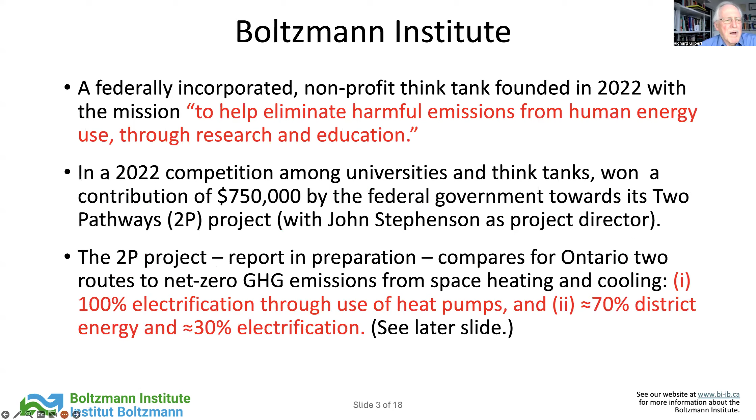Next slide, please. So we want this one, yes.

So we had a lot of conclusions from that study tour, and if you go on our website, you can see it at the bottom right there on all the slides. You can get a report on the study tour, but there were two general conclusions that we made. The first one we didn't expect, and that is that the optimism about decarbonization possibilities for buildings was there and evident, and some communities, big ones and small ones, were almost at decarbonization.

Copenhagen reckons it's about 96% there. One smaller community on Gotland Island reckons it was already there. Everybody we spoke to said, yes, we're going to decarbonize our buildings. By that, I mean decarbonize the building operation, particularly space heating.

We talked to a lot of people about more general climate issues and decarbonization, and there was actually more pessimism than optimism that any of the other sectors would be decarbonized by 2050 or 2045, as some people's targets were. Transportation, maybe in Norway they thought it was possible, but even then not necessarily for aviation and heavy trucking. Elsewhere, maybe not even for ordinary passenger travel.

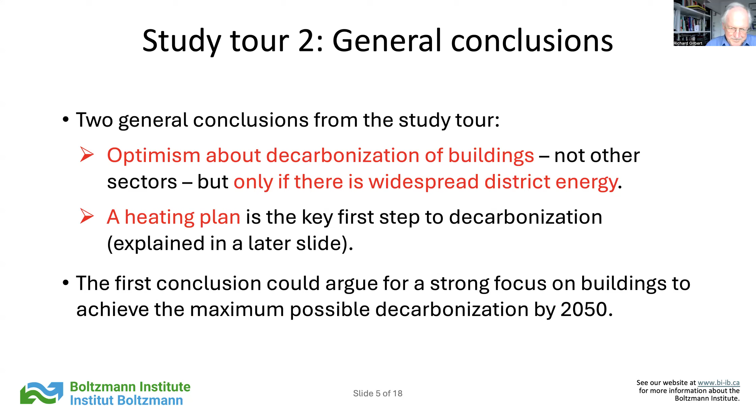Next slide, please. You've gone through two, one back. Thank you.

So, as I mentioned, approximately 70% of the floor space to be available in Ontario in 2050 exists today, and 30% is to be constructed. Now, the 30%, at least in theory, and to a considerable extent in practice, needs little or no added energy if it's built right. If you build it to passive house standards, you can get down to almost near zero, and you can build to net zero standards.

And if you look at this table, the left-hand number column, the peak watts per square meter, that's the amount that you have to put in at the peak. You can see, working from the bottom, that with net zero energy use you don't have to put any in because they are literally at net zero. Everything that they need is either coming from the building, solar, or the building doesn't lose any heat, essentially, or almost none.

The passive house standard recognizes up to 10 watts per square meter. If you look in Ontario, the residential after 2015, that's the current range, 65 to 130 watts per square meter. I couldn't get a number for the older residential buildings, but it's going to be much higher.

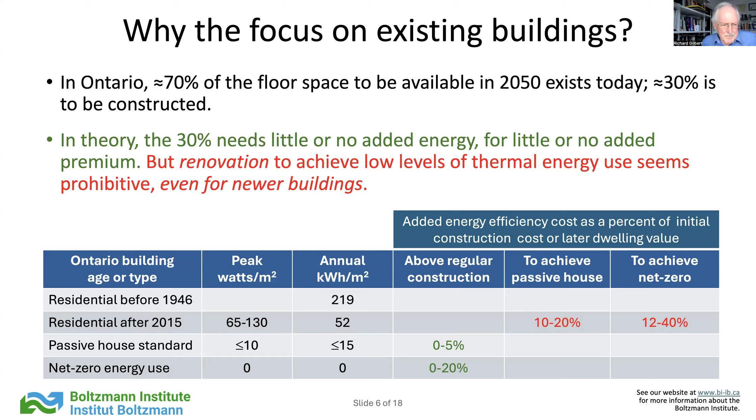Next slide, please. Next slide. There we go.

So this is the largest passive house development in the world, as far as I know. It's in Heidelberg in Germany. It's not right down to zero, so it's got supplemental heating from a wood chip fueled combined heat and power plant. The current cost premium over regular construction is between 5 and 8%. It was at the beginning of the construction of this development

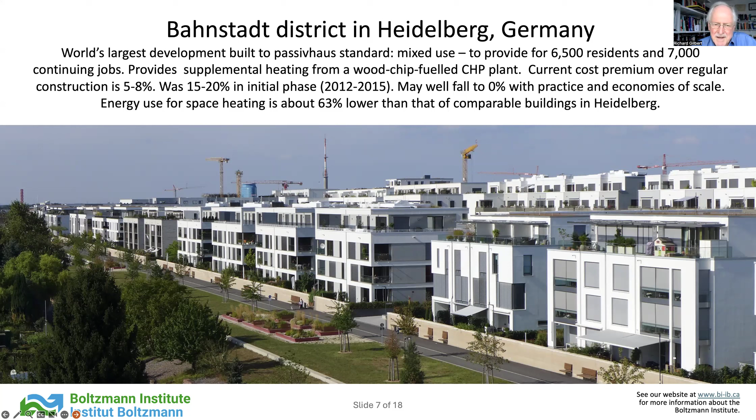considerably higher. As they learned and as they developed economies of scale, the cost of meeting the passive house standard came right down. And it may well fall down to zero in the next few years. I think they're about 80% through the project development now. So far, the space heating energy use is 63% lower than that for comparable buildings in Heidelberg. And Heidelberg happens to have a rather interesting mix of old buildings and buildings that are built to a fairly high energy conservation standard anyway, not yet passive house, but quite good.

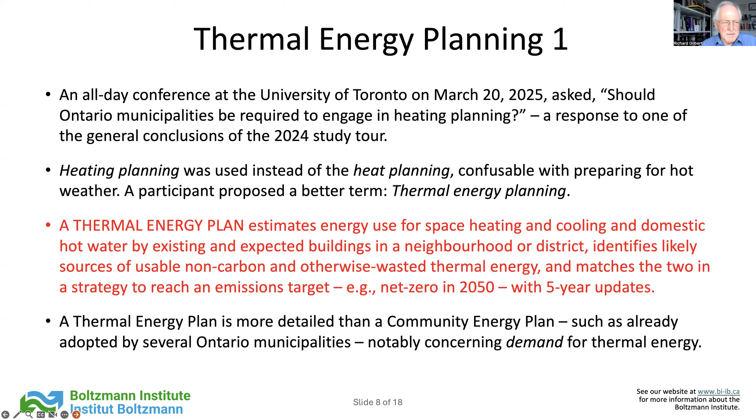So we did a little survey after, and a lot of people sent in emails, and there were two things that were agreed at the conference. One, thermal energy planning is an essential prerequisite for the attainment of net zero greenhouse gas emissions from buildings. That was the first and most important one. And the second one, which there was much agreement about, was that such planning would best be done by municipalities. The area where there was less agreement was who should fund this.

We had an estimate at the meeting from our German friends, and we have numbers from elsewhere, that it's very, very roughly $2 per inhabitant per year to do the thermal energy planning. The typical plan takes a year to 2 years to do. It depends on the resources you throw at it. It has to be renewed every 5 years. So if you average all of that out, you're into, in today's dollars, about $2 a person. It can vary a lot. It's more for smaller municipalities per capita. It's more for municipalities such as Toronto and Mississauga that have a lot of commercial space in them per resident. Next slide, please.

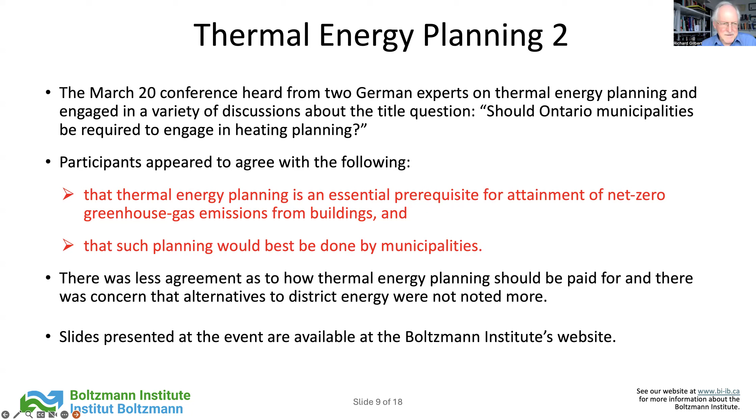We had an intervention, a presentation at the meeting by somebody from IESO, the electricity system operator responsible for planning electricity in Ontario. And he pointed out, Tom Aagaard, that the current planning outlook by this provincial government agency is for less than 10% of Ontario households to have heat pumps by 2050. No indication of what the other 90% is going to have, except that he said that probably they're going to choose natural gas unless there's a change in provincial policy. Actually, at the moment, it's about 70% fueled by natural gas, about 15% fueled by electricity, and the others have wood and propane and a mixture.

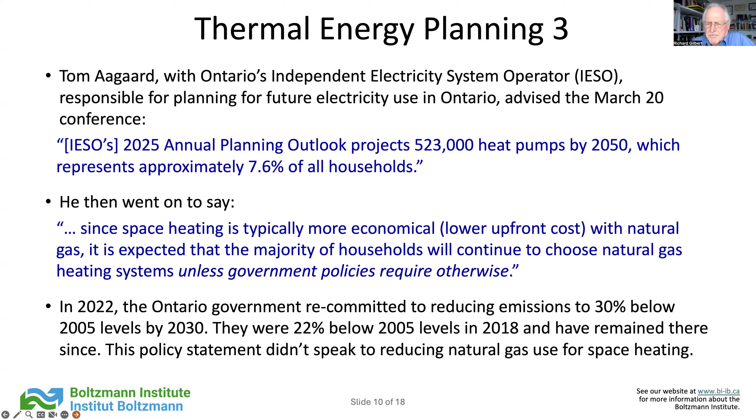The Ontario government does have a policy about reducing emissions, but only until 2030. It reconfirmed that policy in 2022. It originally was said, I think, in 2018 soon after they came in. The interesting thing about it is that in 2018, at the end of the Liberals and the change to the Tories, they were 22% below 2005. Their target is 30% by 2030. They'd got to 22% by 2018, and they're still there. The last 7 years, there's been absolutely no progress on reducing emissions. There has been some progress in some areas, but it's been offset by the large amount of natural gas that's being used to generate electricity. Some of it is because of refurbishment of nuclear plants, but not all of it. Next slide.

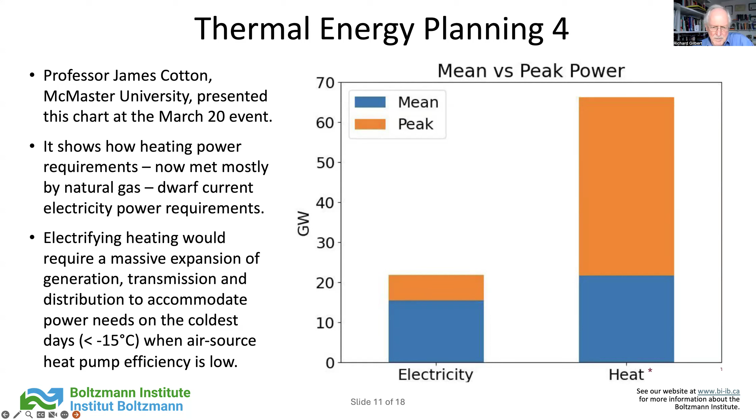So if we don't have thermal energy planning, what's going to happen? Well, we'd continue our focus on solutions for individual properties, giving them all gas furnaces or maybe heat pumps, with some district energy for new development, but the big challenge, which is existing buildings, would be mostly ignored. If we continue as we are, we'll just be letting the marketplace sort that out, and it will be a mess, and it won't work.

One of the interesting things about where we are now in Ontario is that air source heat pumps are actually producing more emissions from their use of natural gas, from the increase in natural gas generation, than natural gas furnaces in houses. And if you don't believe this, go to our District Energy Digest number 9, which is on our website. Look at page 4, and there's the analysis there showing how, at the moment, air source heat pumps are actually worse for the environment than natural gas furnaces.

That will not last if we get rid of natural gas generation of electricity, but while we have it, the basic thing is that natural gas furnaces are about 85% efficient, and natural gas generation of electricity is only about 45% efficient. And that's where you get all the emissions coming from.

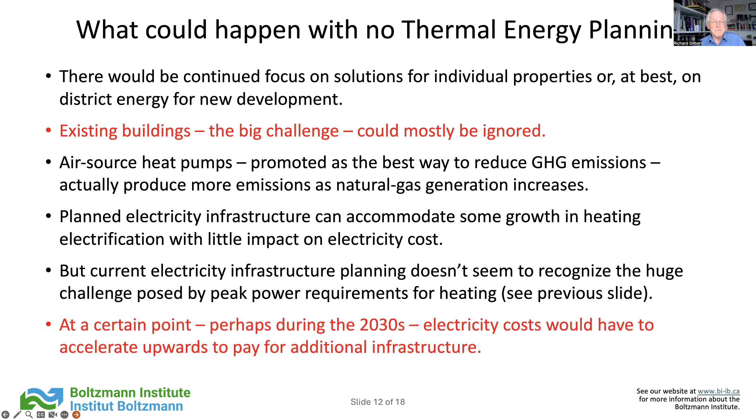Okay, Ontario municipalities could move now to doing thermal energy plans. There's no legislative reason. I mentioned the cost of it. I've given examples for Toronto. I noticed there's somebody from Kingston here, Karen Stoss. I just chose Kingston as a smaller municipality. For the whole province, for the first decade, it would be about 30 million a year, which sounds a lot, but is peanuts when you're talking about hundreds of billions of dollars for electricity generation.

And a bigger problem than funding, although funding is always a big problem, could be that we simply don't have the skilled labor available to do that degree of work on planning. It's nowhere near as complicated as putting in electricity infrastructure. The skill level is considerably less, and yet you certainly need some training, and we're not getting much out of our community colleges and universities at the moment towards that end.

To give you an example, if you look at the University of Toronto, unless I've missed it, there is absolutely nothing. This is the biggest engineering department in the province, in the country, biggest engineering faculty. There is nothing going on in district energy, just nothing at all. Next slide, please.

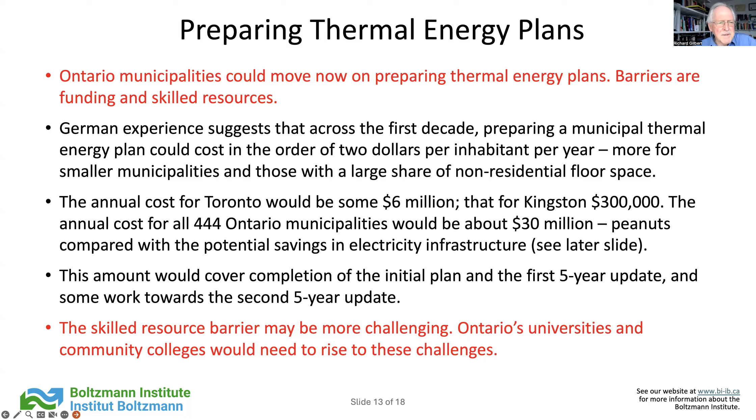So Ontario municipalities presently have all the power they need, except in one area, to get on with district heating and cooling.

Providing they do it the right way, which mostly involves setting up a separate business corporation, such as Markham has done, Markham District Energy, and they conform to a few rules, and worry a little bit about what they are guaranteeing in that business corporation, and so on. I don't want to go into details, but basically they have within limits all the legal power that they need to move ahead.

They need to move ahead on district energy, with one exception, and that is they do not have the power to require connection. Municipalities in BC, and that's the only province in Canada, do have that power. Again, they have to do it in the right way. It's a dangerous tool to give somebody to require them to buy something, and this is a monopoly, and so on.

Interestingly enough, when you look at Europe, some countries give their municipalities that power, Denmark, for example, others don't, Sweden. And yet there's not a big difference between those two countries. Denmark is a little bit ahead of Sweden in district energy, but not that much.

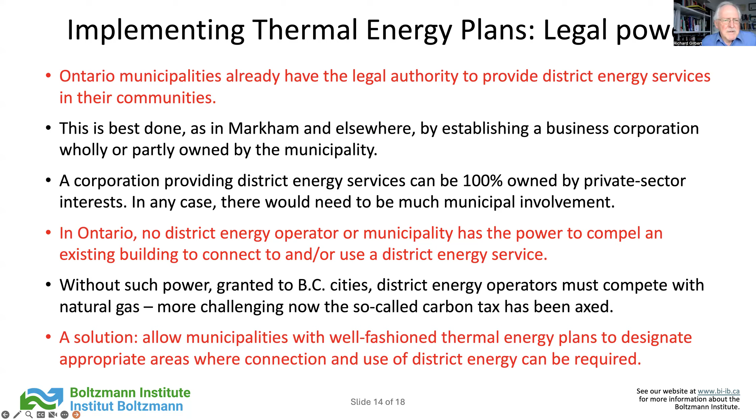Next slide, please. Funding is the other big issue. There's a huge amount of money required. We are working on having an estimate. Our ballpark is that what you need for district energy to serve 70% of the province is roughly half of what you would need to serve 100% of the province with electricity. It would be 80%. Some of it is already served, so it would be a bit less than 100%.

But what we're talking about there are hundreds of billions of dollars. These are extraordinarily large sums of money. IESO has estimated that you need around $400 billion by 2050 to provide for an unspecified amount of heating that is probably short of 100%. They're a bit vague about this, and we don't have firm numbers, but we think that sentence at the top captures it, with quite a strong possibility that you would have overall cost savings if you went down the district energy route.

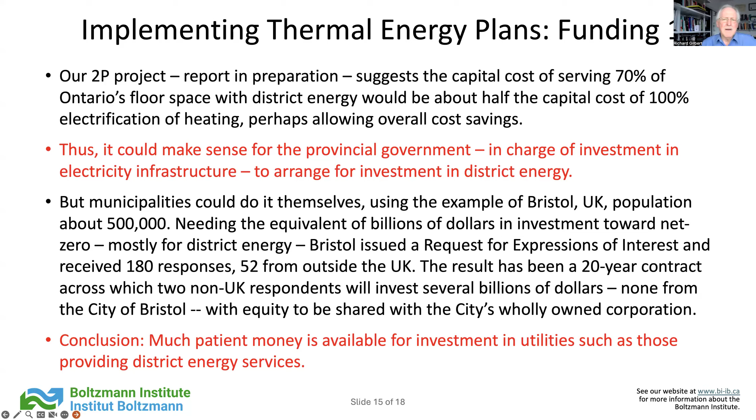So the two requirements for that kind of investment are a high quality thermal energy plan, and we've talked about that. The other one, which is relevant to Ontario, is we need, for the municipal scene, a stable legal administrative context. We do not have that in Ontario. We have a provincial government that is in many, many ways simply arbitrarily overruling municipalities, cancelling their projects, doing things like that. That is not something that investors like.

They would not like their money to go into a municipality or a municipal owned corporation, with the province dickering around saying, oh, we want to change the size of the board, or we're doing this. That kind of interference is not something investors like. Next slide.

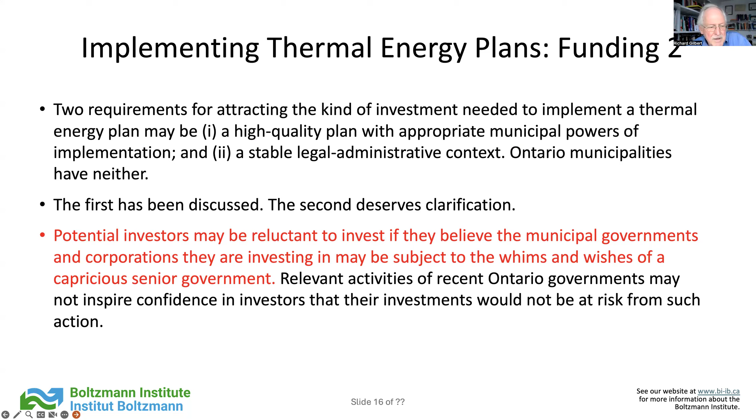So a thermal energy plan is neutral, initially at least, as to how these buildings are heated and cooled. But the generally accepted thing is that if you can do district energy, which you can't everywhere because the densities are too low and other reasons, that's the way to go. And here are some reasons for that. It could be a lower cost. It means that a corporation is responsible for moving towards net zero, not the individual homeowners' choices as to how they do things.

Also, district energy is flexible as to heat sources. That's a hugely important point that requires almost a whole webinar on its own. And another webinar could be on storage, which is something that district energy can do. Storing hot water is less than 1/100th of the cost per energy unit than storing electricity. And that means it's economic to store summer heat and use it in the winter. Enormously powerful thing. So those are reasons why district energy should be looked at before other ways of doing it, but always recognizing that there have to be alternatives. And last slide.

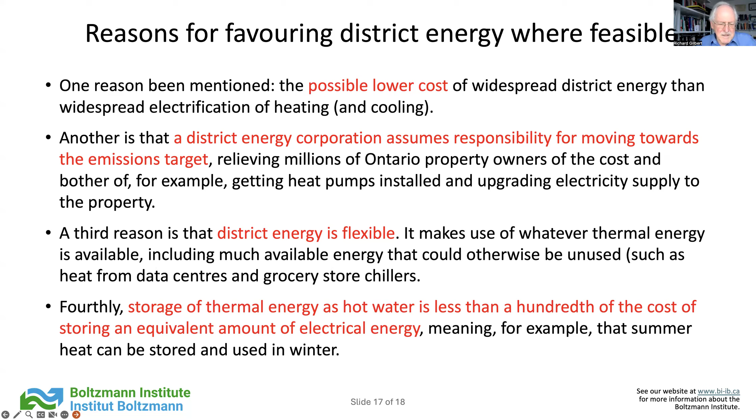Here are my conclusions. Focus in new development on having as little thermal energy use as possible. Focus district energy efforts on existing buildings rather than new buildings. Require Ontario municipalities to produce thermal energy plans, and have the Ontario government support municipalities by empowering connection, facilitating funding, and providing a stable legal administrative context for their activities.

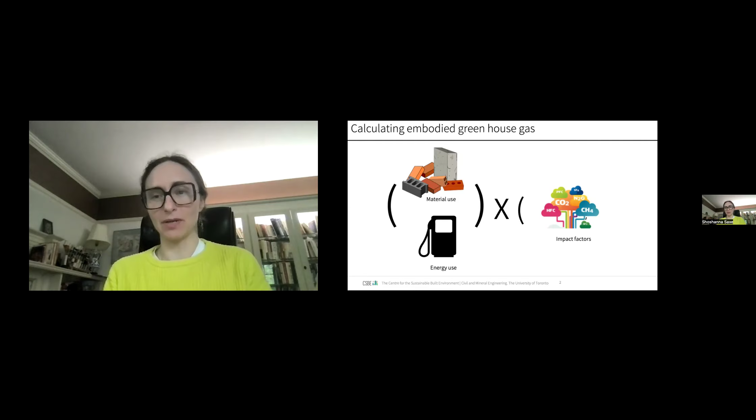And then by the time we get that concrete or steel or wood or brick to a construction site to start building something, all of these emissions have happened upstream. They're embodied emissions. So it's not necessarily that they're sitting inside the material. It's that the process of getting that material required all of this to happen upstream. Every single product we make has upstream emissions. There's no such thing as making a construction material without emissions. Just like my cell phone has upstream emissions, my sweater has upstream emissions. And that's what we mean when we're talking about embodied carbon.

So when we think about the problem of the limits of the environment or climate change as a whole, greenhouse gas emissions, one of the most helpful ways to think about it, I think, is the donut economic framing. So there's the things that we need for social function, for economic function. We need shelter, we need food, we need other things that require manufacturing, health, education, and all of those require some amount of consumption, right?

If we all stayed home, did nothing, ate nothing, made nothing, there would be no emissions. But we want to live as full humans. That requires stuff of some kind. And that becomes the inside of our donut that pushes us to consume, to make energy, to do things. And then there's the outer end of the donut, which is the limit of what the world we live in can tolerate, with all kinds of limits in terms of biodiversity, greenhouse gas emissions. And the safe operating space is the space in between those two, where we meet our social and economic needs, but we don't screw the planet.

And so in my research, we look at the donut for the architecture, engineering, and construction industry, where the inside of the donut is how much we need to build. We need maintenance. We need more public transit. We say in Canada over and over again, we need 5.8 million more homes. So we know we need to build more than we have been building. But also we have the climate limits, or in this case, a greenhouse gas budget, which is the maximum we can allocate to construction emissions.

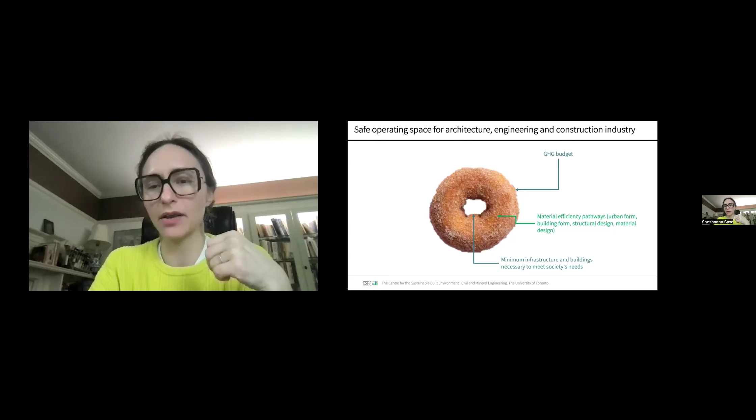And then the safe operating space, the tasty part of the donut, is what we're looking at in our research for ways to use urban forms. So urban planning, architectural design, structural design, material selection, both how we make our neighborhoods and how we make our buildings, how we make our communities to fit in between these two limits. And those are the big questions that I ask in my research. How can we, on one hand, do more to meet our infrastructure deficit, and less on the pollution side?

This is really important when it comes to resource use and construction, because resources are a growing part of what's driving emissions. So whereas resources were only 15% of the emissions in 1995, they were already about 23% by 2015, and the latest numbers are closer to 40% by 2025. So it's been accelerating really fast, and a big part of what is driving our environmental challenges right now is the consumption of resources. And of course, we consume resources not only for construction, but construction is a biggie, and it does a little bit less than half of all of that. So they say about 17 to 20% of global emissions every year are coming from things like construction now.

So we were able to take a look in Canada and say, given the things we build, just in terms of resource consumption and construction, how much emissions are we emitting every year in Canada just to build things? And we found on the latest data available, so this is data from 2018, so pretty close to what we're doing now, probably a little bit low, we were on a consumption basis, in terms of all of the materials we're using, even if they're manufactured in another country, about 90 megatons of emissions every year. And this works out to about 1/10 of Canada's production emissions every year. But we also know that we were building much less than we needed, right? This is leading us to the infrastructure deficit we currently have.

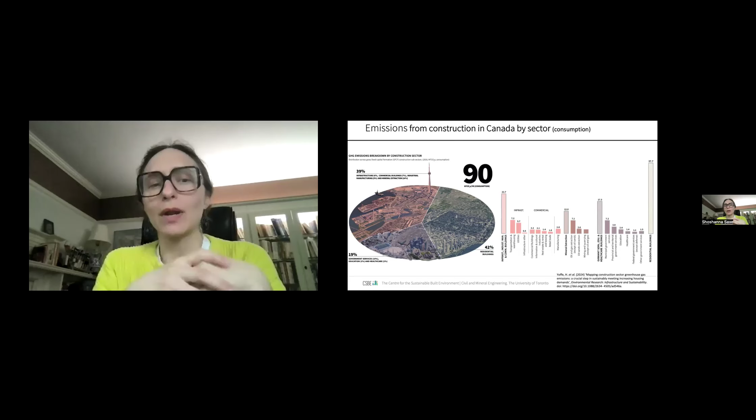About 40% comes from residential structures, about 40% comes from infrastructure, so roads, water pipes, the things in between. That also includes things like the oil sands and mineral extraction. And then another 20% comes from non-residential buildings. And when we look at where most of these emissions are happening, you can see what materials they come from. So concrete, metals, and wood are really our big materials driving emissions. Then we also have the design services, running the lights, having the buildings we design and work in. MEP is mechanical, electrical, and plumbing. We see asphalt, that's from roads.

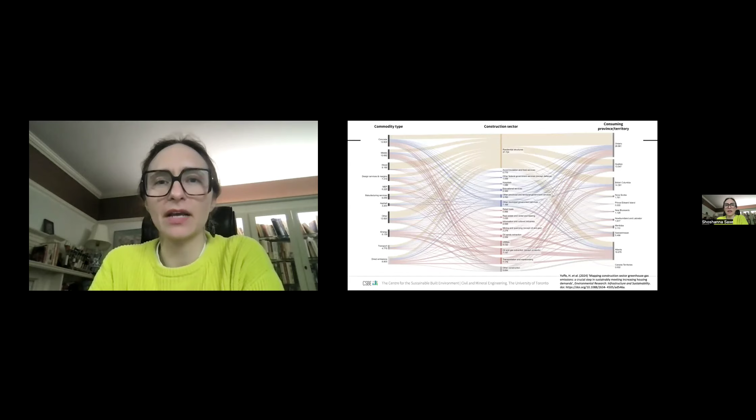Excuse me, Dr. Saxe, there's a bit of a problem with the slides. It's hard to read because of the way the screen layout is, and I'm wondering if we could try resharing, because the slides are coming out very small on the screen. Oh, I can stop sharing my face. I can share a different way. Okay, 1 second, I'll reshare.

How's that? Thank you. Okay, great.

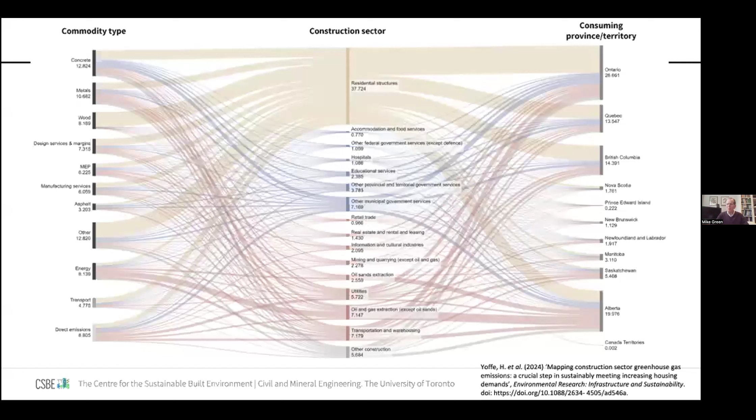So this led us to this challenge, which is just to keep in mind. The first bar chart is how much emissions we were emitting for construction in 2018, with the stuff that's hashed out, the things we were importing from other countries. So the solid bars are just what was being manufactured in Canada. If we just say that needs to be reduced by 40%, evenly all sectors do the same, the second bar is what we have left in 2030.

If we said at the same time from 2018, we need to have 3.6 times as much housing produced in a year as we did that year. So we'll just multiply, scale linearly everything up by 3.6 times. That leads us to the third bar, which you can see is the tallest. And there's a huge gap then in between if we just scaled up business as usual construction to where we need to go.

And then even our materials will get better, right? We're getting better at making concrete, we're getting better at making steel, we're getting better at making insulation. Even if those get better by 25% by 2030, that still leaves us with a huge gap. So we have this tension that emerges in between what we need to build, what we say we want to build, and our climate commitments.

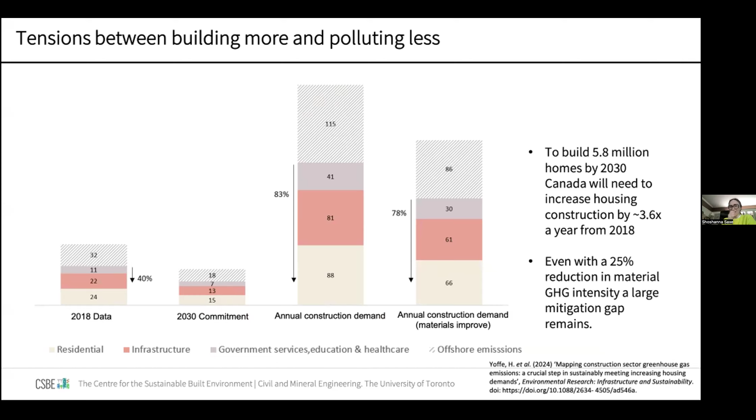And so there's many ways to manage this. We could say, well, other sectors need to get better faster so that construction can pollute more. Though at this point, we're looking at construction being like 40% of what Canada can emit in 2030. That's a lot. We could say, well, screw the climate. We could say screw housing affordability, or we could say we have to start doing things differently. So I'm going to go with mostly the last one. How could we do things differently to build both more and pollute less?

So this brings us to thinking about the other side of the donut, which is how much is enough? Canada says we need to build 5.8 million homes. We haven't really specified what that means, right? We know we don't mean 5.8 million studio apartments. We know we don't mean 5.8 million 7-bedroom mansions with a 6-car garage. But what do we mean, right? What is enough? What would we describe as good housing?

You know, one of the most rapid scale-ups of housing in Canada was really in the 50s and the 70s. In the 50s, we built a lot of 2- and 3-bedroom single or single and a half story cottages. You still see them all around the country. They are much, much, much smaller than what we build now. In the 70s, we had a huge boom of 3- and 4-bedroom apartments, which provide some of the most affordable housing in Ontario. Those are very different than what we build now. So what do we mean?

This is data from the US, but Canada is the same. Our homes have gotten much bigger and actually not taller, mostly just wider, while the number of people living in them have gone down. The average detached home built in Canada, in Ontario now, is 100% bigger than one built in the 1950s and 30% bigger than one built in the 1990s.

So when I was a kid growing up, the average single family home being built then was 30% smaller than it is now, and families were bigger. So we're building more space, but fewer people are living in them. And this is one of the challenges, is as our families get smaller, we need more housing per capita than we used to need.

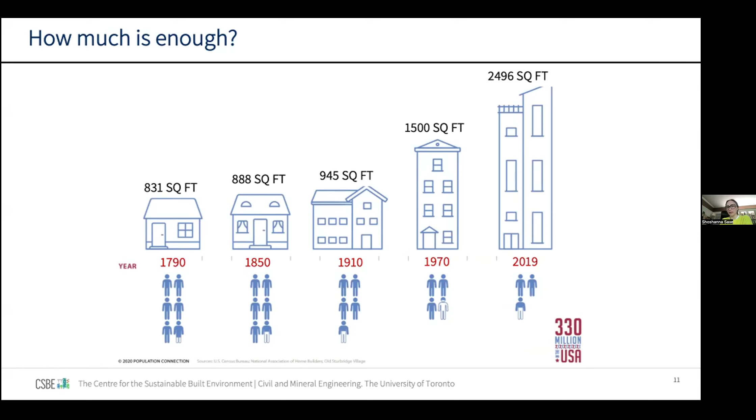Another way we could look at how much is enough, and not just history, but also looking at just, well, what are legal minimums? Has there been any thinking about this in the past? And all around the world, there are laws about what makes for legal minimum space. So we say 9 square meters, which is about 90 to 100 square feet per person in Toronto. England and Spain have come up with bigger numbers. France sometimes has smaller numbers.

But it's also a question of design, you know, how the space is used. And so we need to balance between these things. Canadians live in some of the most space in the world. We live in about 60 square meters a person, which is a lot bigger than most other people. In Asia and Hong Kong and China, people live much closer to that 15 square meter number.

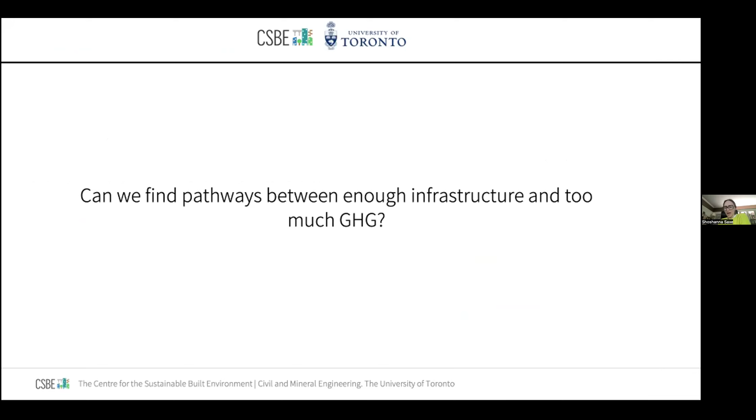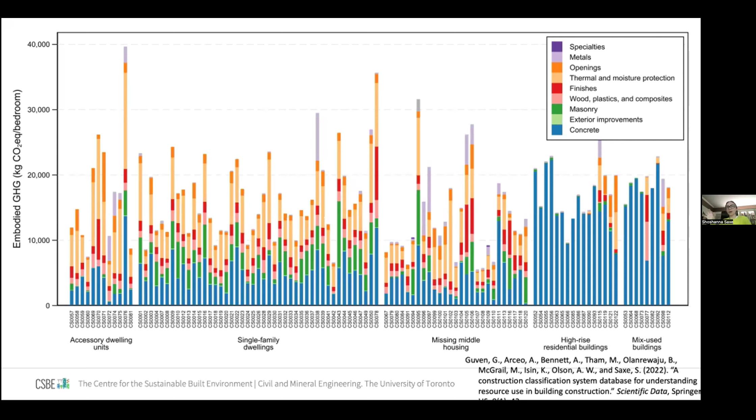The only thing I want you to take from this graph is that buildings vary a lot from one to another. And we've also looked at different styles of buildings in different places around the world. And again, buildings vary a lot from one to another. But one of the biggest things that we found is bigger buildings obviously have more emissions. So if you have a big single family home and 3 people living in it, you're going to have more emissions per person than a reasonably sized or 1950s sized single family home with 3 people living in it.

We've also looked into whether we could just replace all of our materials with recycled construction materials, which is something people talk about a lot. Like, couldn't we just recycle more? Even if we're wildly optimistic, the answer for us in Canada at the moment is basically no. Because we need to build so much more than we tear down, we can't just recycle construction materials to build new buildings. We are going to have to keep using construction materials, so we have to be good stewards of them.

It's a little bit different in other countries, like in France or in Northern Europe, where they tear down a lot of older buildings. They have more older buildings than we do, and their population isn't growing as fast. So there it would be sort of 50%. For us, it's a much, much smaller percentage. So we cannot just recycle our way out of this problem.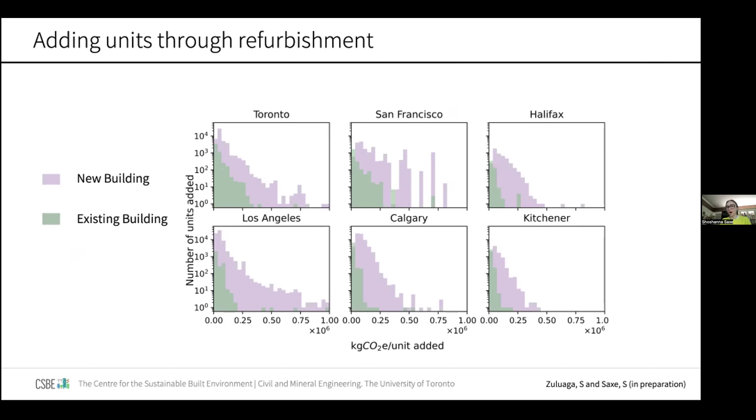And mainly it was better to retrofit single family homes or buildings with a small number of units than it was to try and put more units into buildings with a lot of units. So if a building already has 20 units, getting more units into it is pretty close to building new. Whereas if you have like a single family home and you split it into 2, then you get a lot for low GHG.

So another thing we did, this is one of the major efforts we've done in the last few years, is we modeled every neighborhood in the entire country if we were going to build it with that urban form now. So the urban form would stay the same, but we'd use modern construction materials and modern construction techniques. And if we looked at all of the embodied GHG in the buildings and in the roads and in the water to serve those buildings, how much GHG emissions would it take to build the entire country? And then we could use that as examples for how we should build in the future.

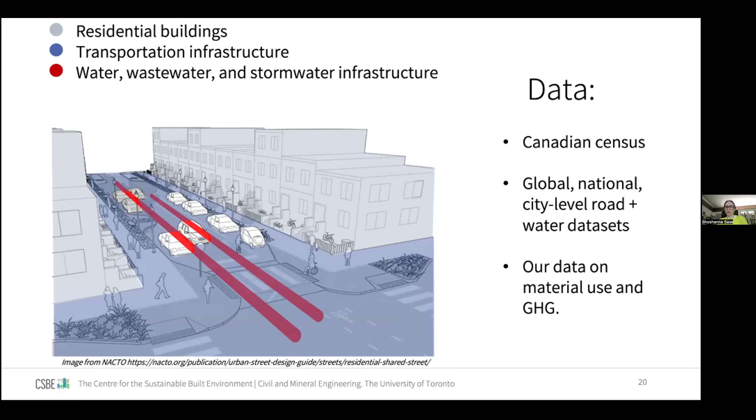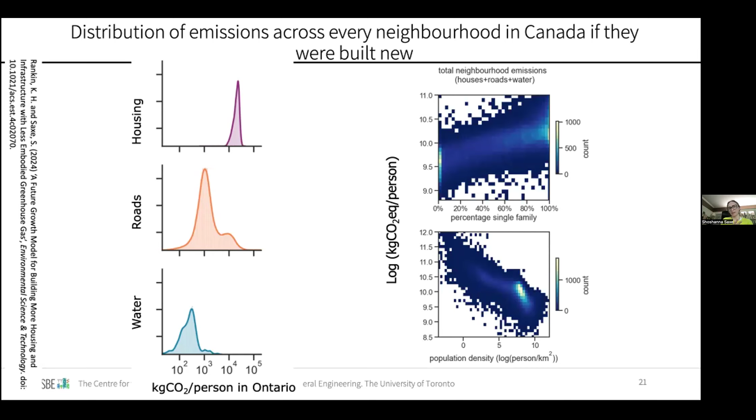And the other thing we found is that the more single family homes you have in a neighborhood, the higher the percentage of single family homes, the more embodied GHG in everything. There's a range, as you can see this big blue bar, but as you go higher along single family homes, the worse it gets across the board. And similarly, as a neighborhood gets denser, as more people live in a neighborhood, the lower GHG emissions we have per capita, because you get the benefit of shared infrastructure, shared spaces. And if you have attached buildings, you have fewer walls. So the more sharing in resources there is, the less embodied emissions there are.

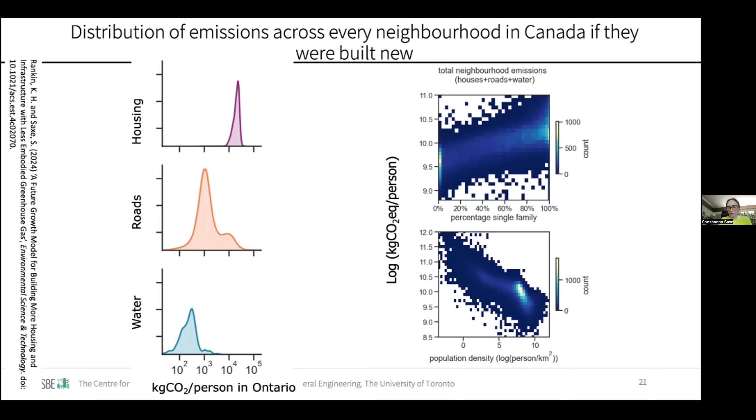So this is from Edmonton. Similarly, in the single family neighborhoods, we see 27,000 kilograms per person, so 26, 27. As soon as you move away from that to any kind of multi-unit form, tall, wide, it gets better.

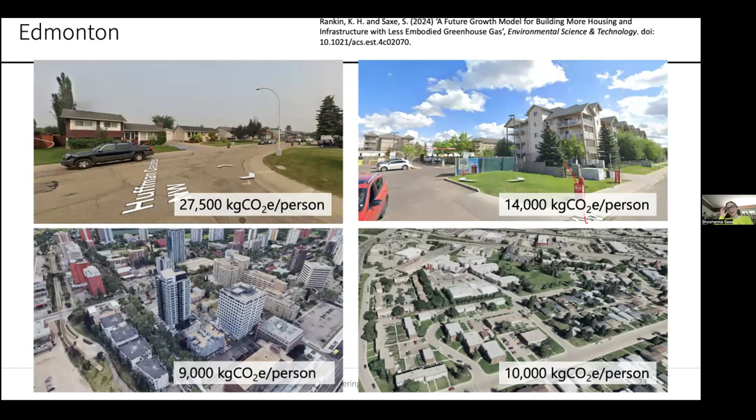Montreal repeats the pattern, and the single best neighborhood in the entire country we found in terms of GHG was the Plateau area in Montreal, which is very high density with almost all multi-unit buildings. And they're low, so they're built out of light materials. And you tend to have an apartment per floor. This is where I lived when I was an undergraduate student. So you have an apartment per floor, but it also ranges over a huge area. There's a lot of them.

And one thing that you'll hear people say a lot is, well, we just need to build neighborhoods like the Plateau. But something that I would keep in mind is a lot of the country we're trying to retrofit. So if we're building a new greenfield site, sure, let's build it like the Plateau or like other low GHG European style neighborhoods. But if we're retrofitting the city of Toronto, for example, we would have to knock down half the city to turn it into the Plateau. We have to work with what we already have, in which case building fewer taller buildings fits in better with less tearing down of the city.

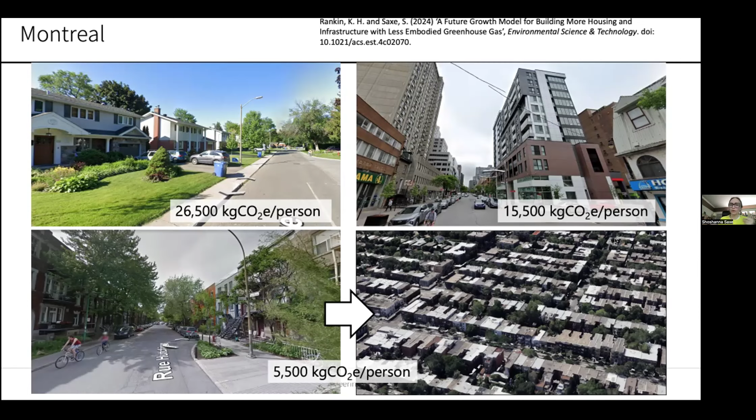So it depends. Are we talking greenfield or retrofit? When we look across the country, the single worst neighborhood is on the East Coast. This is not a farming community. It's just a place where people live on farm-sized lots. And so there's a huge amount of infrastructure per person.

Then we see a lot of the single family homes. And then you get down to sort of 10,000 kilograms per person to 16 with any kind of multi-unit neighborhoods, and the best one being this one neighborhood in Montreal. So our next questions were, well, everything we've studied so far, can we find a pathway to do both? And so we looked at these 5 different pathways.

So one, change the form of neighborhoods being built. So not single family suburbs, really anything else, anything multi-unit. Design better buildings. You saw all of those variations between one building, just design to the best ones. Improve material manufacturing, repurpose existing buildings better, and build where the infrastructure already exists. So more infill construction, so we don't have to build more infrastructure.

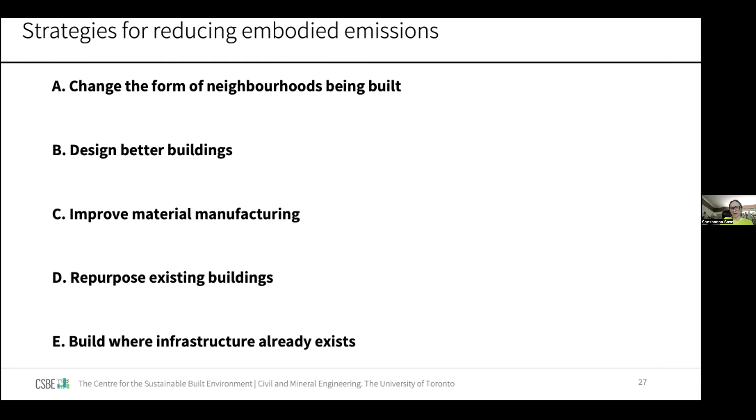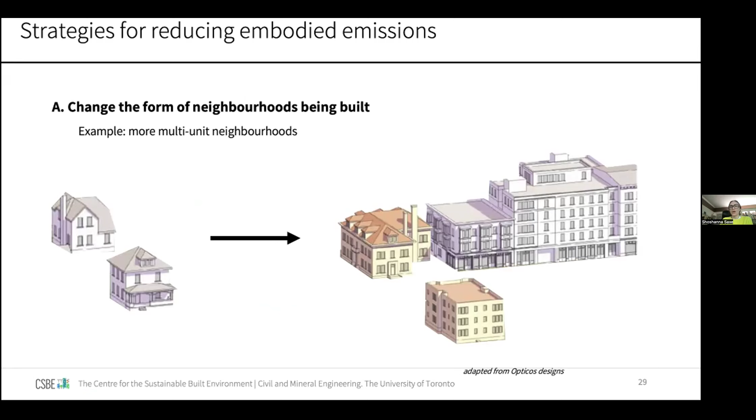So if we start looking at changing neighborhood form, so go from single family neighborhoods to any other form, and again, this includes tall towers, really anything else, it makes a third of the difference we need to make. So we make that change from 26,000 kilograms per person to 10 to 16,000 kilograms per person just by making that one change. We don't even have to change our technology, nothing else, just one change stands by itself.

Another thing we can look at is changing how we manufacture materials and also changing the types of materials we use. So our steel and concrete industry, they're not world leading by any measure, but they're trying to do better. They're working on that. We have a nationally agreed pathway to low GHG cement. I think there's either one that just came out or is soon going to come out for steel. We can use nature-based materials for things like insulation instead of hydrocarbons.

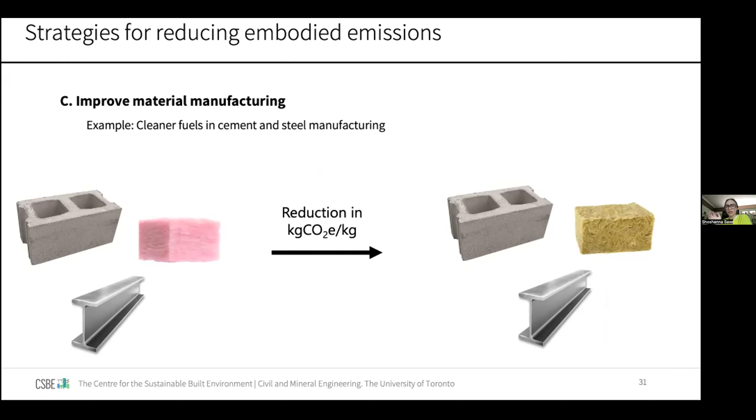And all of this change together at its most optimistic will, by the early 2030s, improve about 25%. But because time goes by in the meantime, that actually doesn't do a 25% change for us now, because we're going to build things this year and next year and the year after. So by 2030, it does about 10% of what we need.

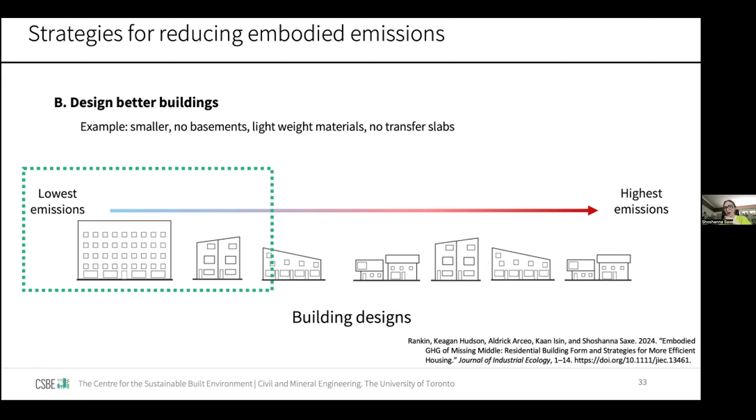We could also design better. Right. So when we're building, if we're going to make single family homes, instead of making them ginormous, huge wastes of space, make them smaller, don't have basements. When we're designing big buildings, make them boxy with no transfer slabs. When we're designing mid-rise, use single stair, don't have a huge amount of underground parking. Underground parking is the single most polluting thing we build. So parking bad, we should not have parking. If we design better, that does another third.

And again, we're now really only talking about things that we already know how to do, or are already happening. So we know how to design better. We know how to change form. We're not really doing those, but technically they're easy. We're improving materials. Technically that's hard, but we're working on it. But that will not be enough by itself. Okay, so we've made it most of the way there. We need a couple other strategies to help us in.

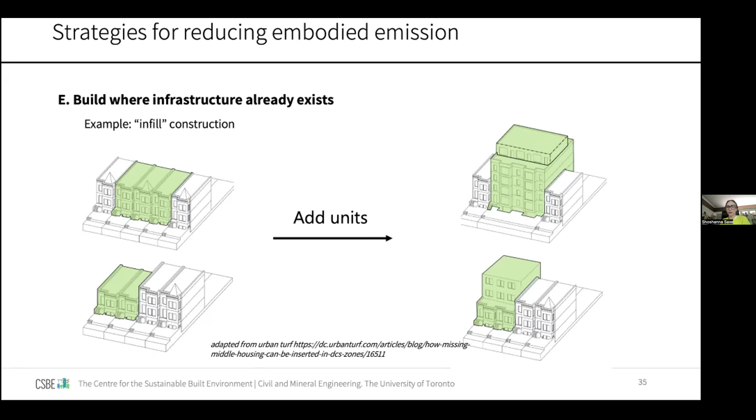So another one is infill, build more units where we already have them. So in single family neighborhoods, build garden suites, basement suites where there are already basements, subdivide existing buildings to have more units. This is particularly powerful when you can build where the infrastructure already is. So now we can use the roads, we can use the sewers. We don't have to build massive new roads, massive new sewers. And then we're almost at the line.

And then the final strategy is split what we already have, the renovation approach. And this is particularly effective if we split single family homes into multiple units.

It can be for rental, it can be for different owning, it can be to facilitate multi-generational living, which lots of people want; their kids to be able to live nearby. But we have, as I said, way bigger homes with way fewer people living in them, so that we have a lot of unused space that could be multiple units. And that is much lower GHG, especially when we do it at the scale of not really big buildings. And that gets us under the line.

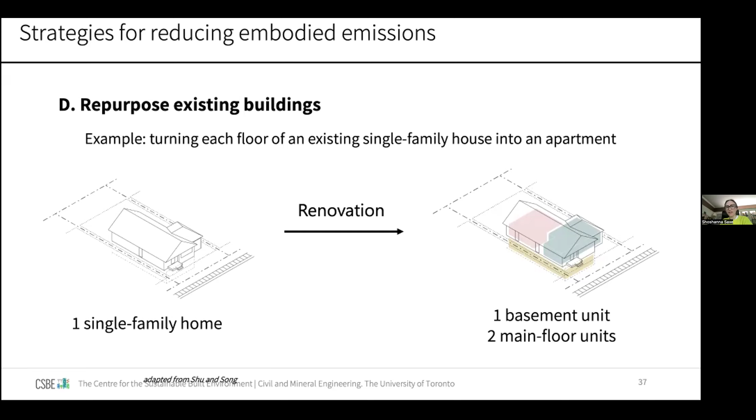So these are all technically possible, happening. They don't require new inventions. They don't require any magic. We can do these things. We just have to be willing to do them. It would require a different approach to the way we develop communities than what we have done in Canada or North America for much of the last few generations, but it is technically totally possible. And it aligns with our housing crisis really well in terms of all of these things lead to cheaper, more affordable communities.

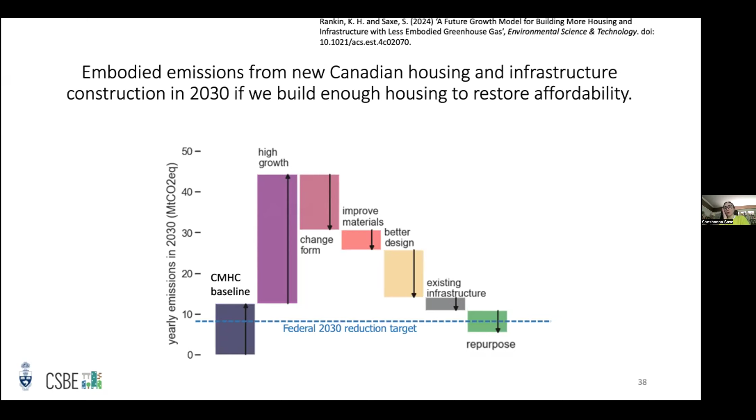If we put the numbers all together, we modeled a worst case scenario where almost everything new housing we build is single family homes, a business as usual scenario, and a best case scenario. In the worst case scenario, we would be building just in residential about 94 megatons a year. And just for scale, Canada's GHG budget in 2030 is 443 megatons. So just residential construction would be a quarter of that, without accounting for all the things I said are excluded here.

If we do business as usual, it'll be about 57, but if we do the best case, it'll be 8. So the scale of change we can make here is more than 10 times. And then the cumulative emissions also follow.

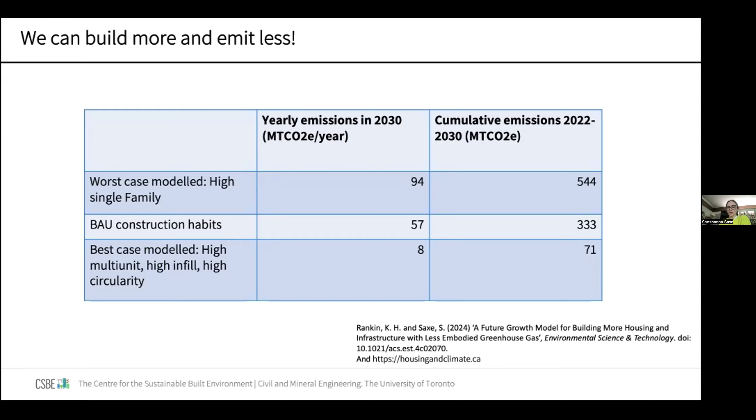So what? If I was going to leave you with any messages, one thing that we need to keep in mind is we have to build smaller and denser. That doesn't mean worse. It just means different. We need to design better. We tend to have oversized spaces in North America because we have really shitty design. And so if we have better designed spaces, they can be awesome and wonderful and aspirational and great just by using our resources more efficiently, right? Like if you've ever been to a hotel room and you're like, oh, it's so well laid out, or if you've ever been on a cruise and you're like, actually, this works for me, when there are space pressures, we can design really well.

We need to pursue low GHG materials, especially where they're widely available already. Low GHG insulation is widely available. It's a really good substitute material. Other materials like low GHG steel or concrete or even wood substitution, the math is a little bit tougher, but on insulation, it's just a clear win.

We are probably going to need other sectors to improve faster. We're going to need transportation, which is pretty easy to decarbonize at this point. We need more public transit, more biking, more electric cars, so that we can make more space for construction, so that we can build all of the things we want. Construction is a hard to decarbonize sector, and we need to give it some breathing room by improving faster in other areas.

We're going to need more and better public space so that people don't need to privatize their space so much, right? If you have an awesome community center nearby, you don't necessarily need a rec room or a swimming pool or a playground in your backyard for your kids if you have safe, great places for them to go. And we see all around the world that people are very happy to live differently than we live when they have access to good public amenities. And so that's something that we need to start taking really seriously. Our design crappiness tends to extend beyond the home and into the public realm.

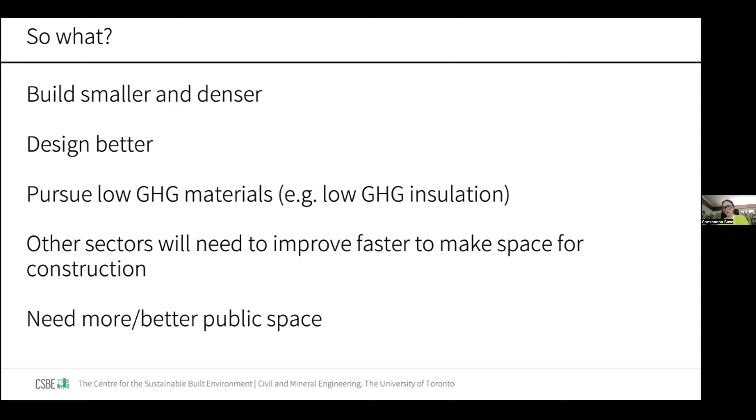But there are all kinds of co-benefits to this. We only have so many construction workers and only so many construction worker hours in a year. If we're building oversized, we're using them to not produce that much housing. It's cheaper and faster to build if we build smaller. You can build it with fewer tradespeople.

When we build denser, it costs less to build the infrastructure and maintain it. The tax requirements of low density neighborhoods are so much higher than the tax requirements of even slightly higher density neighborhoods. If you want to pay higher taxes, you want subdivisions.

If you want to pay lower taxes, you want more multi-unit neighborhoods. If we are constantly at risk of flooding now, basements, as I said, are some of the highest GHG emitting things we build. Underground parking, they're very, very prone to flooding. If we bring the things we build out of the ground, not only will it be better for the environment, not only will it be faster and cheaper to build, but we'll be less likely to flood. And as I said, when we have multi-unit buildings closer together and with a good public realm, our tax base goes further.

A couple of years ago, I was traveling with my son, and he was then 7, in Germany. And he was like, "Mommy, why is it just better here? Like, why are the streets nicer? Why are the playgrounds nicer?" And I was like, well, let me tell you, if you have this many people living on a street and they're each going to pay $5, the $5 goes further when you have more people.

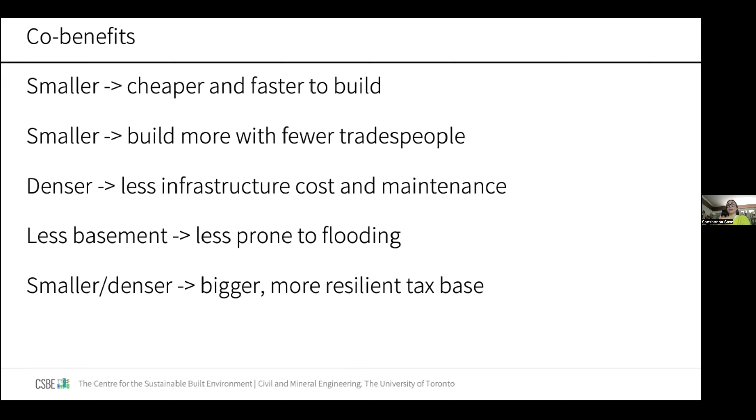And so we can do all of these things. We have all the know-how we need to build much more sustainable communities. The benefits of them are knock-on, but they do require us to let go of some of the orthodoxies of what we think is a nice place to live in Canada. And so with that, that's it for me. I would love to answer any questions.

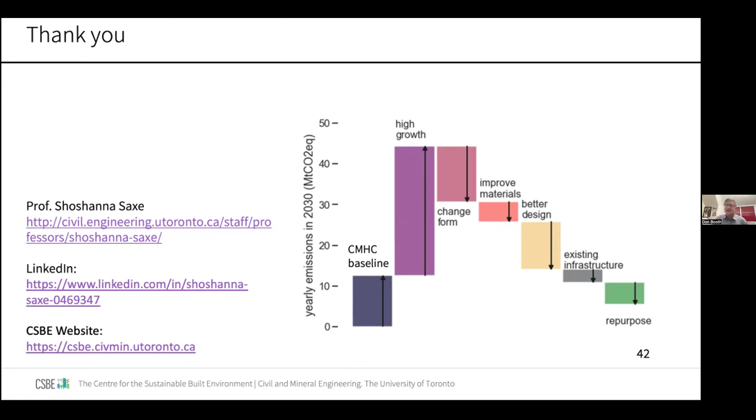Thank you very much, Shoshanna. As coming from a family of engineers and lawyers, that was very edifying. And turn it over to Don Booth, who will deal with the questions. Thank you again. Thanks again, Dr. Saxe. I have a couple of questions in my pocket, but before I put my own forward, raise your hand if you have a question.

And actually, there's one that I suspect others have, which is, Dr. Saxe, what are your thoughts about the new government plans to build lots of housing and to use some prefab? So from a social standpoint, I think it's great. I think it's really good that we're staying serious about building lots of housing. I think it's important. I'm nervous about what it will mean for our future if we don't. I'm 40, and so I bought young, so I'm like the last generation to be able to afford somewhere to live. But people even 5 years younger than me, I see how upset they are and how angry. And so I think it's a really good thing.

From an environmental perspective, prefab isn't magic. It can be great. It can be bad. So I think the policy has the potential to be a very good one from both the social and environmental standpoints, but there's more that we need on the delivery. The previous government did include considerations of embodied carbon in some of their efforts, and in the design guide, which the federal government started to release, which I'm hopeful will stay part of the conversation going forward.

But one of the things which is really nice is the embodied carbon and the cost question are very well aligned. It is cheaper to build things that require less materials. It is cheaper to build things that aren't underground. It is cheaper to build things stick frame with well-skilled workers at a multi-unit rather than single family. And so I'm hoping that alignment will stay and that we could get very good policy out of this.